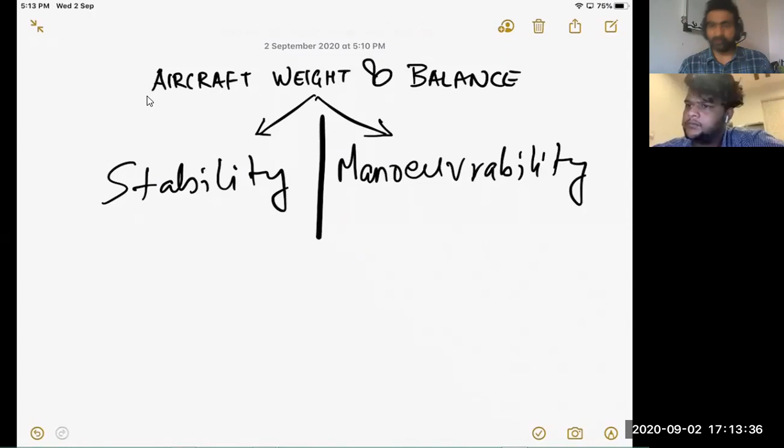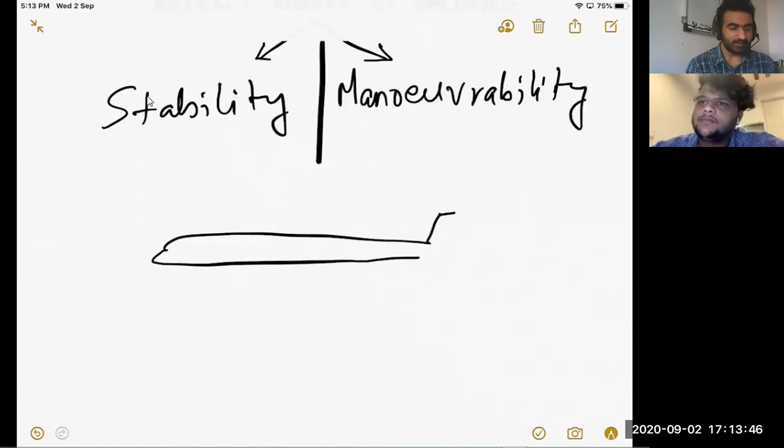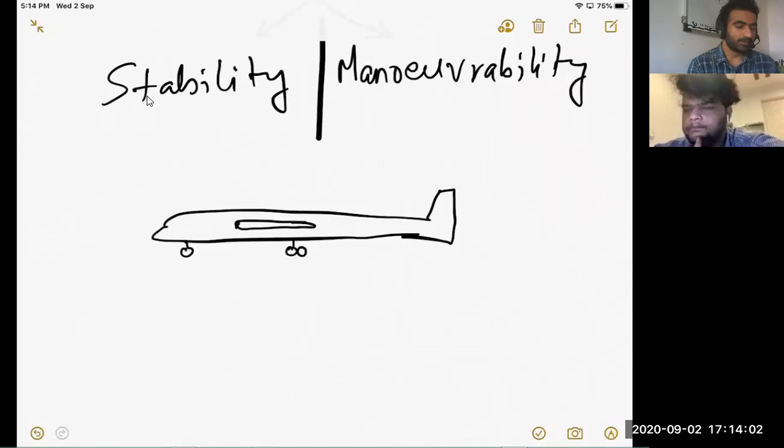So we'll keep stability and maneuverability in mind, and we'll understand that weight of an aircraft is one of the four major forces acting on an airplane. Now this is my airplane with a cross section of the wing. This is my nose wheel landing gear, and this is my main wheel landing gear.

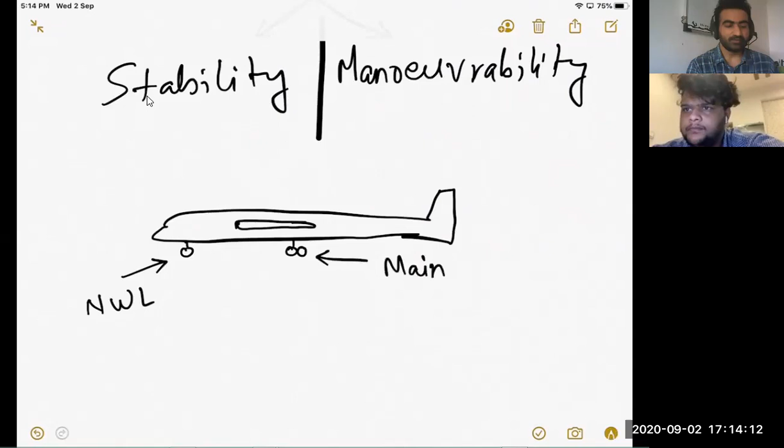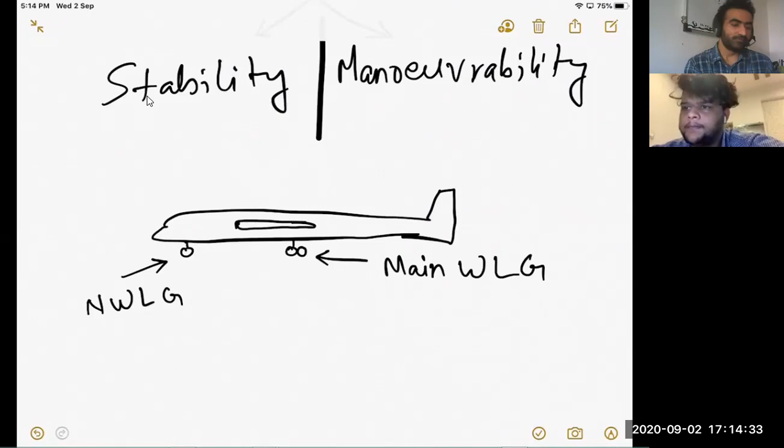Your major commercial aircraft, your Cessna, all these aircraft will have nose wheel and main wheel landing gears. There are certain aircraft which have main landing gears and tail landing gear. They don't have nose wheel gear. When you look at a cross section, you will see the nose landing gear is like this, and the main landing gear is like this. If the aircraft is like this, so nose landing gear and main landing gear like this.

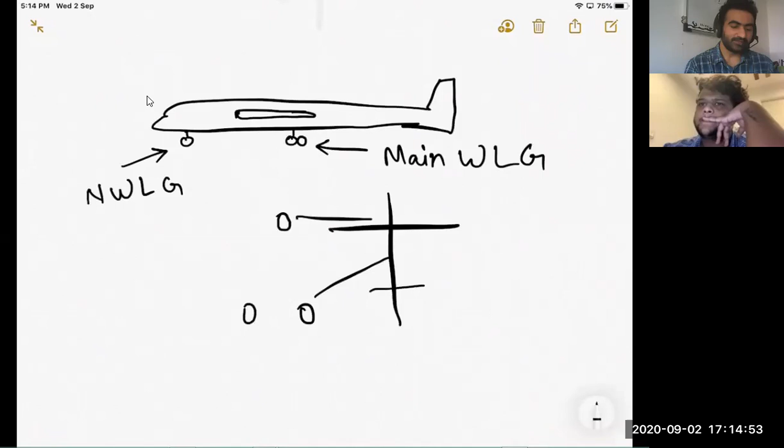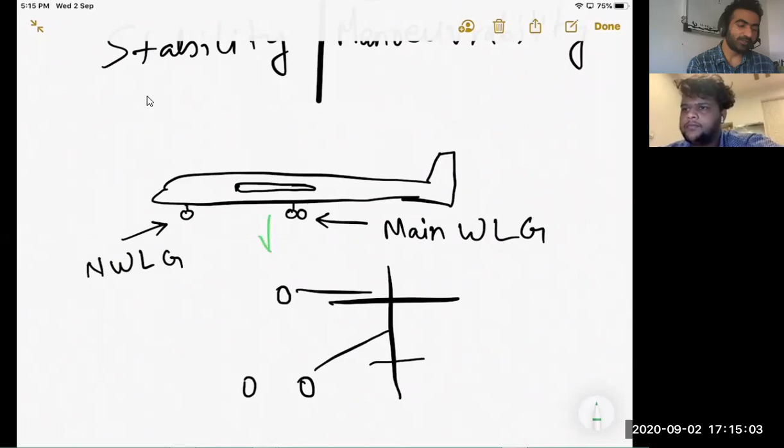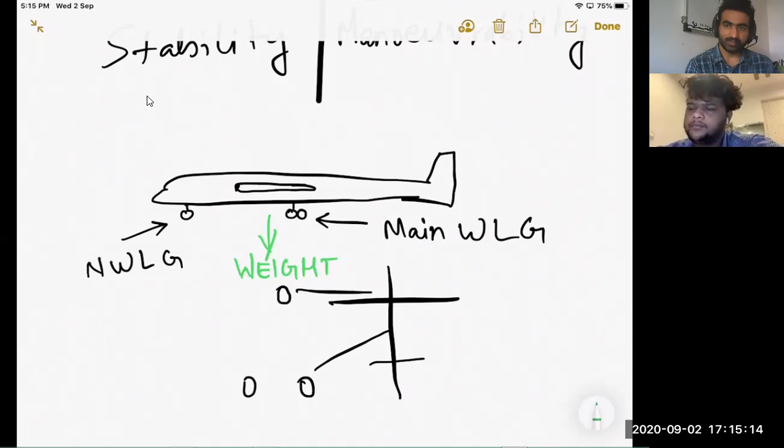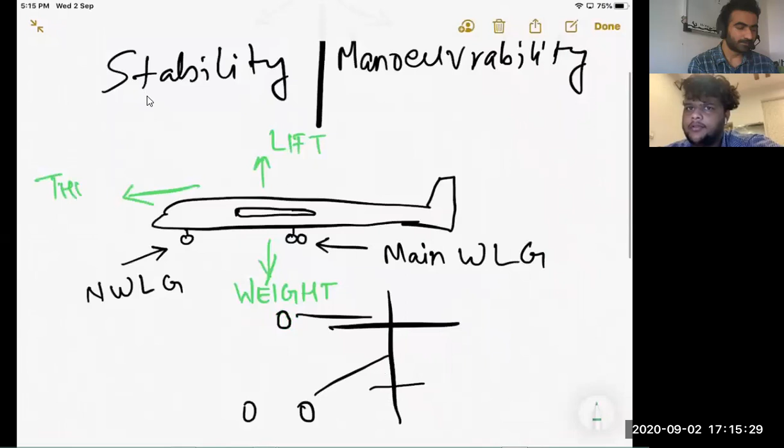Now, an aircraft is supposed to be under four forces. The first force that acts on an airplane all the time when it is on ground is known as weight. In order to counteract weight, we need to lift the aircraft up to fly with a force known as lift. In order to generate the lift, we need thrust. The moment you start getting thrust, there is an opposite force to thrust, which is in the opposite direction, known as drag. These are four major forces.

Now, all these forces act on an aircraft at a certain point where the whole weight of the aircraft is said to be existing. This area is known as center of gravity, CG. All forces act around or about this center of gravity. This center of gravity is very important. Your center of gravity determines your stability. Your center of gravity has to be within certain limits. It should not go beyond its limits. So every center of gravity has a forward limit and an aft limit.

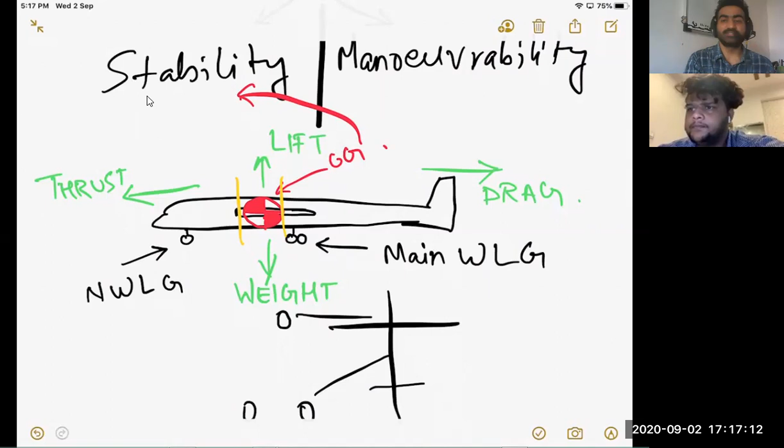The moment you start turning the plane, like you pitch up for takeoff, your center of gravity will move back. When you pitch down or when you are trying to put the nose down, the center of gravity will move. The movement of center of gravity should not exceed the forward CG limit and aft CG limit. Forward CG limit and aft CG limit. Now you will get a lot of sums where they will ask if your CG is within limits, or forward of forward limit, or behind aft limit. All these calculations we'll be doing in future.

Now CG is not a point, but it's a range. Now we need to know what is this range and how can we mark it on an airplane. So for every aeroplane, starting from a datum known as a reference point, taking a unit in mind, it could be millimeters, centimeters, inches, or feet, the aircraft is marked in points. This reference datum could start from the nose of the airplane, or from the nose wheel of the airplane. It will always be mentioned. Whenever it is not mentioned, you will assume that the nose wheel of an aircraft is the datum. Anything behind the datum is positive.

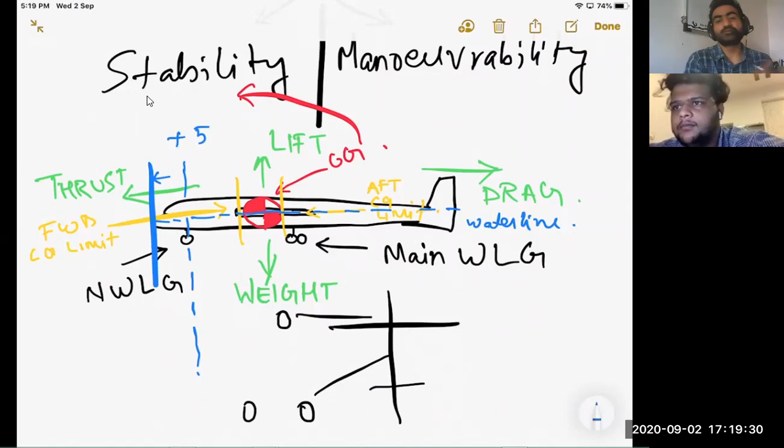So let's assume that the datum is at the nose cone of the aircraft. Then all stations are measured like this. This line is known as waterline. Now, using this line, I can nominate stations for every aircraft equipment. Where is the co-pilot seat or where is the pilot seat located? So I can say the pilot seat is located at +5. It means 5 feet from the nose of the airplane. I can say it goes up to +5 to +7. It means the range of the pilot seat is from +5 feet to +7 feet from the nose of the aircraft.

Similarly, I can determine where is the CG of my aircraft. So my CG of an aircraft could be said to be between +12 to +16. It means the total range of the CG goes up to 4 feet. Center of the CG will be +14, +2 feet here and there. Similarly, you can find out where is the tail fin of the aircraft. It could be +25. So you know it is 25 feet from the nose of the airplane.

Similarly, you can determine where is the cargo area, where is the passenger seating, where is the lavatory, where are the fuel tanks, where are the water tanks, potable water tanks, where is the generator, where is the alternator, where is the battery. So everything is given a location with respect to this datum only.

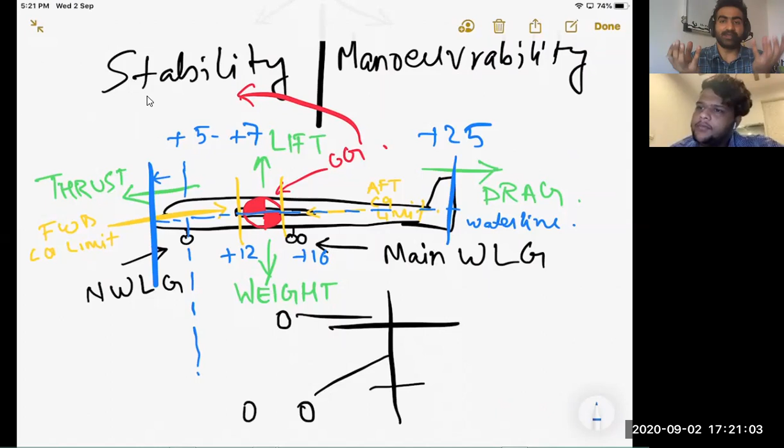Everything has mass. So while putting all this equipment on your aircraft, you have to make sure that the aircraft is balanced around the CG. So the CG acts as a pivot point.

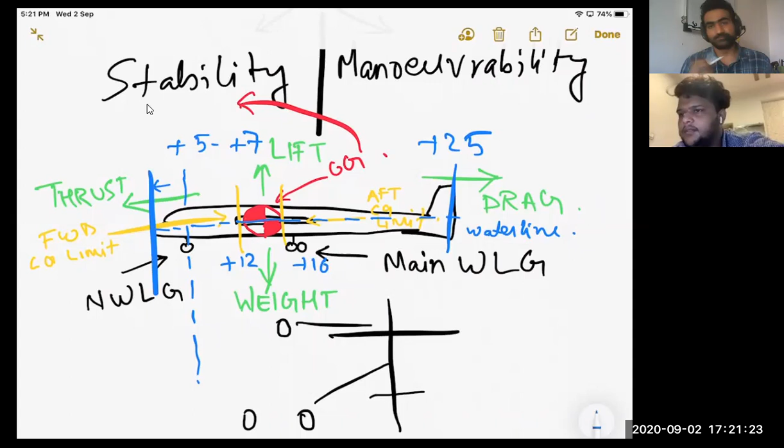If I say the aircraft is moving up, then it moves up with respect to the CG of the airplane. So like this and like this, just like a seesaw.

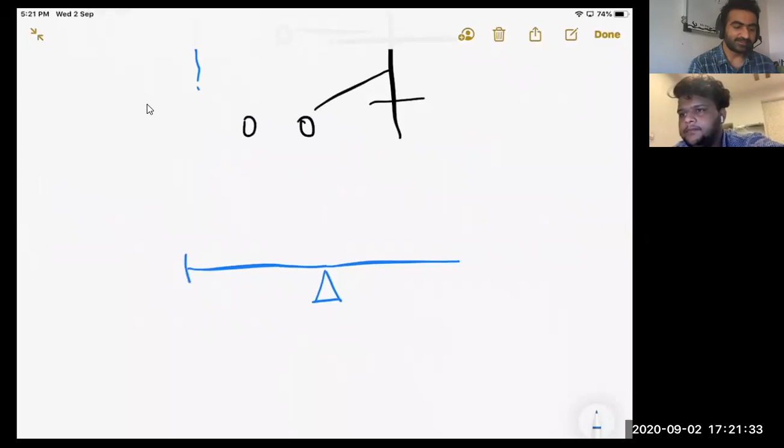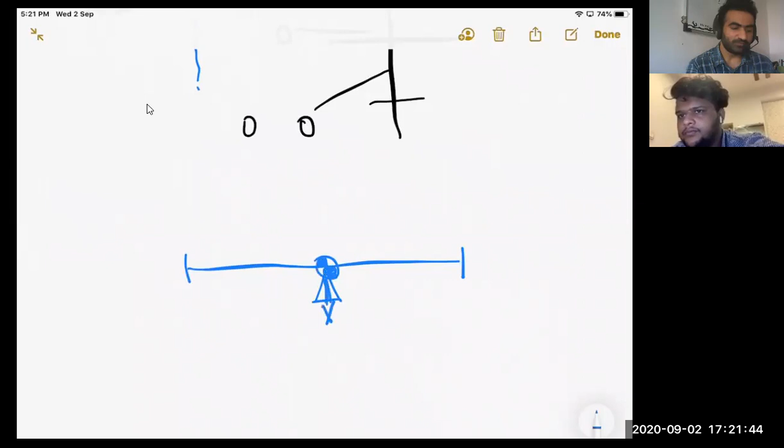Do you remember how a seesaw works? It needs equal length on both sides. This is the CG of the seesaw. All the weight is going down from here. Say this is 10 meters and this is 10 meters.

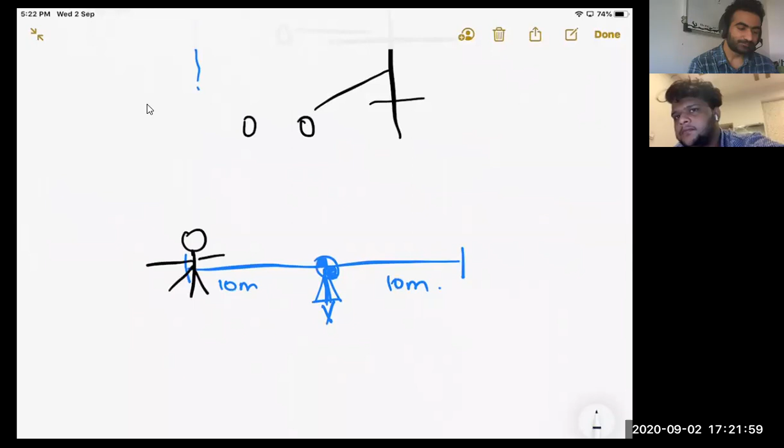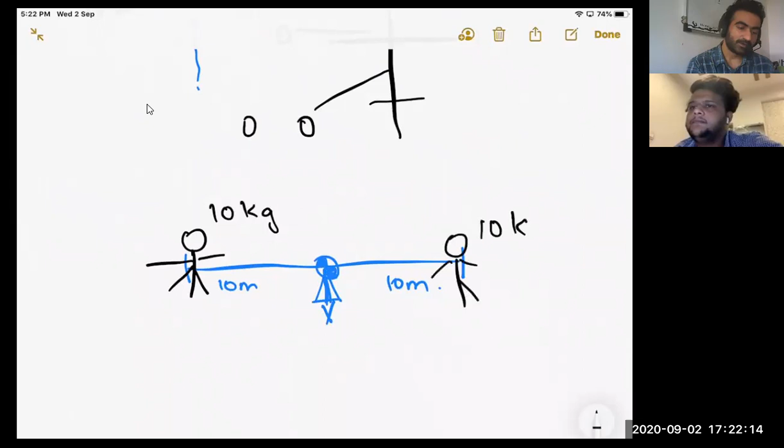Now, if I have to make a child sit on the seesaw, say a person sitting here, 10 kg, a little child. How much weight do I need on the other side to balance the seesaw? Same, 10 kg.

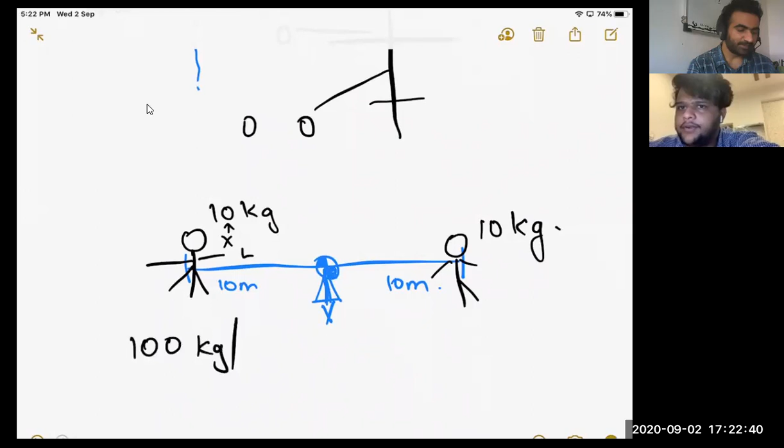This length multiplied by this mass or weight gives you 10 into 10, 100 kg per meter. Same here, 10 into 10, 100 kg per meter.

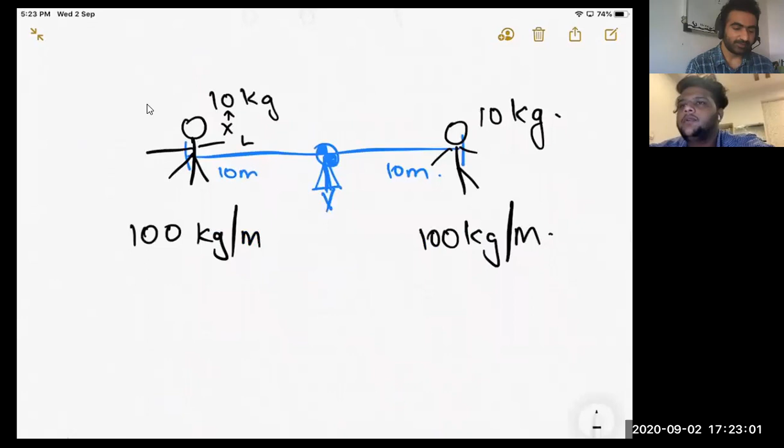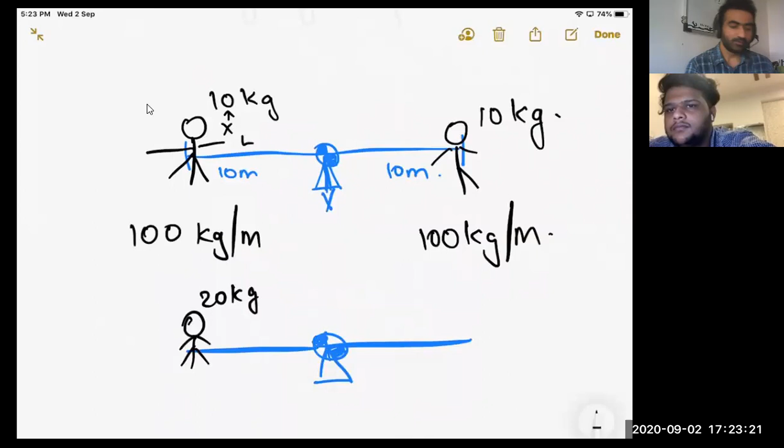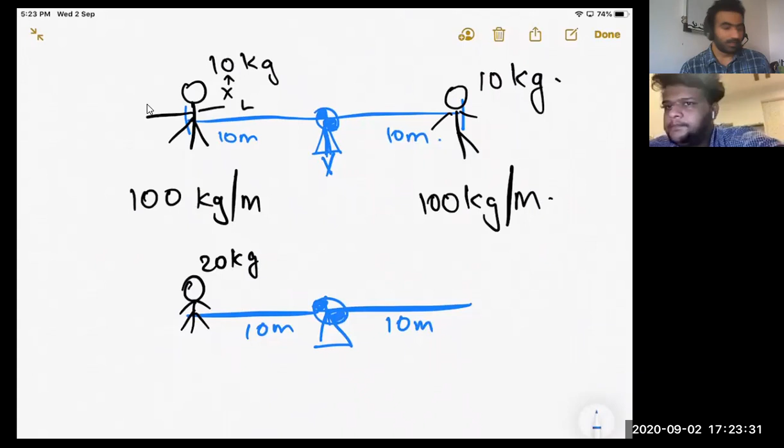Now say there is an elderly child who is not 10 kg, but 20 kg, sitting on the seesaw. We both know that this is 10 meters, this is fixed, we cannot change it. What should I add here to balance? Same 20 kgs.

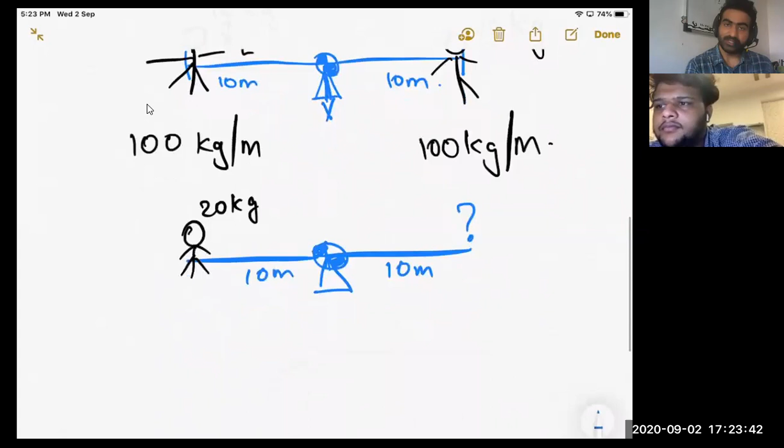Good. Why? Because you need an answer of 200 kg per meter. And here also you need 200 kg per meter.

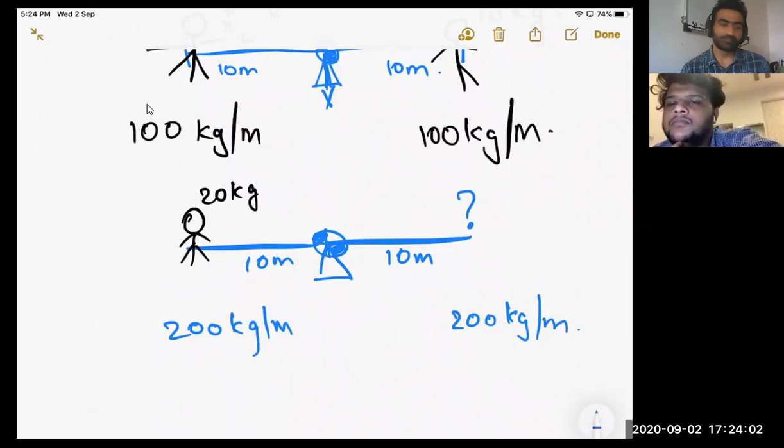What if I don't have a 20 kg child? I only have a 10 kg child. So how will I balance? We knew that 20 into 10 gives 200. Here I have a 10 kg child, so we need to match 200.

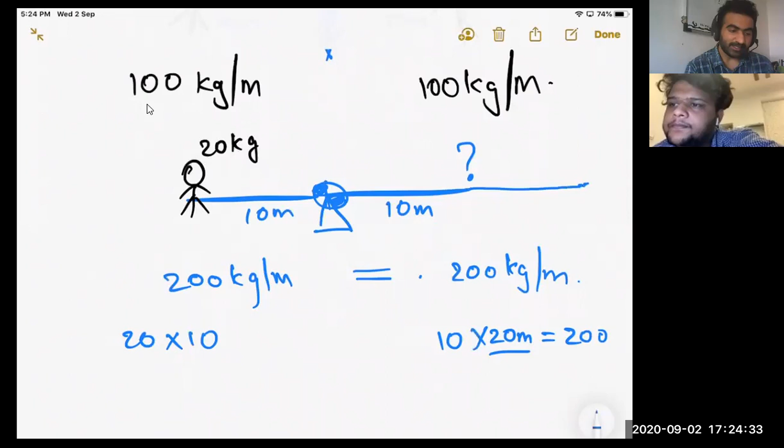So we'll increase the length. By how much? By 10 meters, that is 20 meters. So if I increase the length by 10 meters, then I can balance the seesaw using a 10 kg child.

This length that we have here is known as the balance arm. This is how aircraft loading is done, in simple words.

You check the station number, compare it with the CG, how far it is with respect to CG, and then what is the weight of this equipment compared to this equipment, and how can I balance both the forces, the weight, on both sides of the CG?

So if I have a 20 kg passenger sitting in the forward section of the aircraft, my aircraft will be balanced. If I have a 10 kg person sitting in the aft section of the aircraft at station plus 20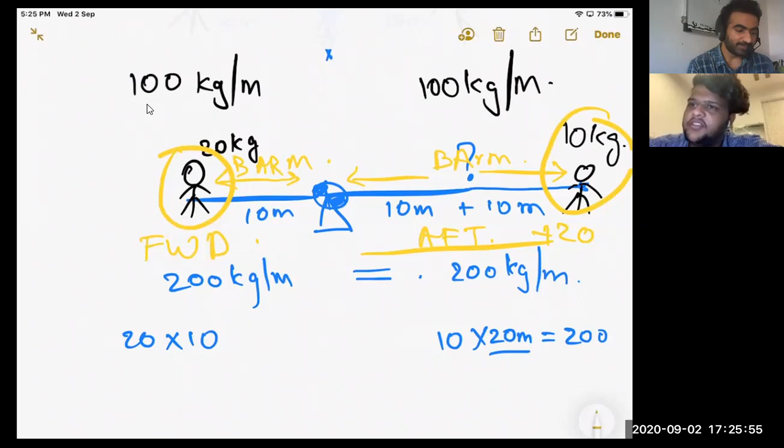from CG, and here it is from CG minus 10 from CG, because it is forward of CG right now. So forward of datum or forward of CG becomes minus, rear of CG or aft of CG becomes plus, just like the datum.

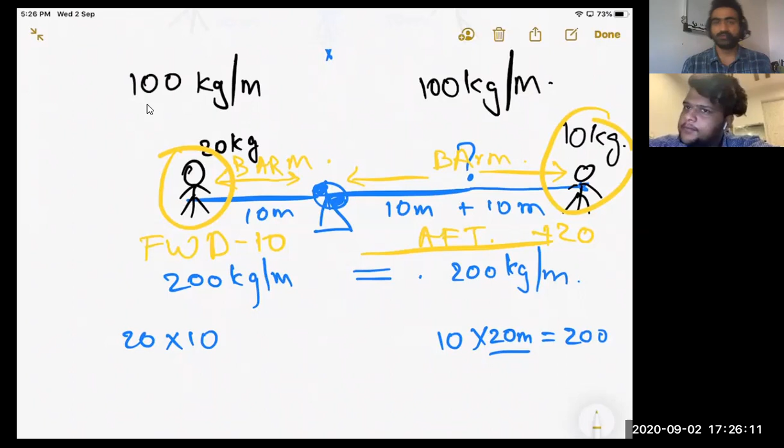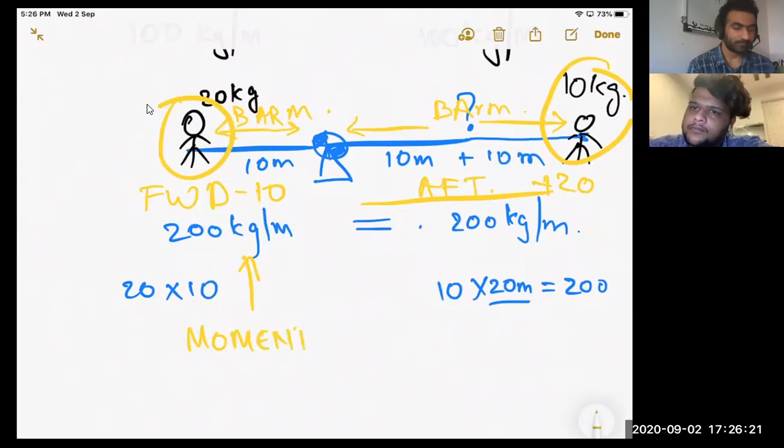This is how you do loading. This force, which is a combination of length into weight, is known as moment. Are you following? Yes, I am.

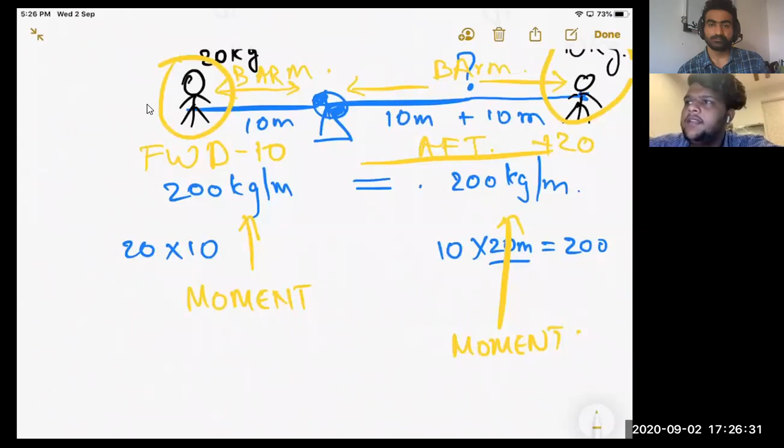So if you have an aircraft which can seat up to 140 passengers, but you only have, say, 20 passengers, do you think you can give those 20 passengers the first 20 seats from the forward cabin of the aircraft? Yes sir, I can give them.

Why? Then the balance of the aircraft will shift. You will need an equal amount of weight equally spaced from the CG, or you will need a lesser amount of weight at a farther distance in the cabin. Either you give 10 people forward cabin and 10 people aft cabin, equally separated from the CG, or you calculate the moment force and decide where to sit whom. Are you following? Yes.

So, is this not just for smaller aircraft, like turboprop aircraft? No, this will happen mainly every day for every aircraft before flight. Okay, for every aircraft, every flight.

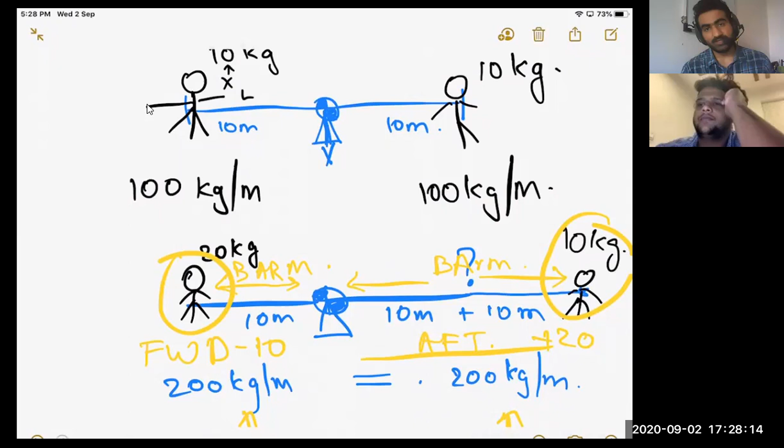Passenger load has to be equally distributed, calculating the moment and force equally. Cargo load has to be equally calculated using the same force.

In any basic aircraft, there are two cargo locations: one is forward cargo and one is rear cargo. The position is given in such a way that we have space to add or remove cargo to balance the forward arm or rear arm.

So what is the arm? This becomes the forward arm from CG, and this becomes the rear arm.

For smaller aircrafts, it is very easy to do weight and balance. For bigger aircrafts, the procedure is the same, but it becomes a little complicated because more fundamentals and more units are used. For example, if an aircraft is flying and the CG limit is forward...

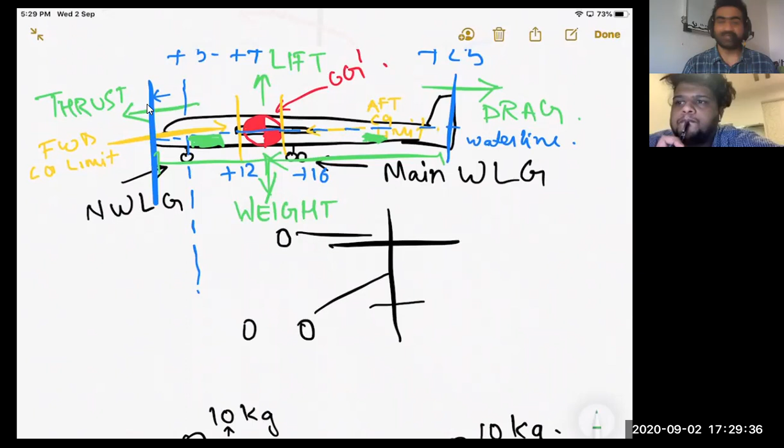If the aircraft weight is forward of the CG limit, then certain things happen affecting the stability and maneuverability.

This is what we'll be learning: what happens to the stability, what happens to the maneuverability, and if it is aft, will it stall because there will be no speed then?

When CG is outside of the forward limit, your stalling speed increases. You stall later, at a higher speed.

Why? Because, see, if this is the CG point of the aircraft, if the aircraft CG is forward of it, the aircraft will be like this. This is not how an aircraft stalls, aircraft stalls like this. So it will take an aircraft at a higher speed to stall like this.

If my CG is behind the limit, then the aircraft will always be nose up like this, so it will stall earlier than the specified stall speed. So this is how you have to imagine.

If the CG is behind the CG limit, aircraft will be nose up. If the CG is forward of the CG limit, aircraft will be nose down. Now when the aircraft is nose down, the stability actually increases.

Yes, stability increases, it means it is difficult to maneuver the aircraft. You don't need increased stability, it is not good always. Everything has to be within limit, everything is predetermined by the manufacturer, so you have to stay within limits.

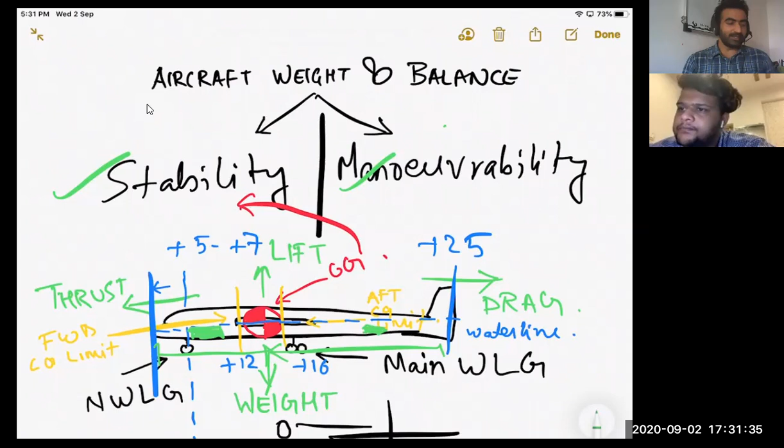Now, how many landing gears do I have? I have one nose wheel and two main landing gears.

These are the points where the actual weight of an aircraft could be measured. So what you do, suppose if the CG of an aircraft is here in the center...

Then you calculate the moment force for the nose landing gear by multiplying the arm and the weight. So where is the nose landing gear with respect to CG? How far ahead? Say it is 5 feet forward.

You put the nose wheel landing gear on a weighing scale. There are small weighing scales. You jack the wheel, lift it, slide the weighing scale in between, then let the wheel rest on the weighing scale to measure.

And this has to be done beneath all three landing gears: right main landing gear, left main landing gear, and nose wheel landing gear.

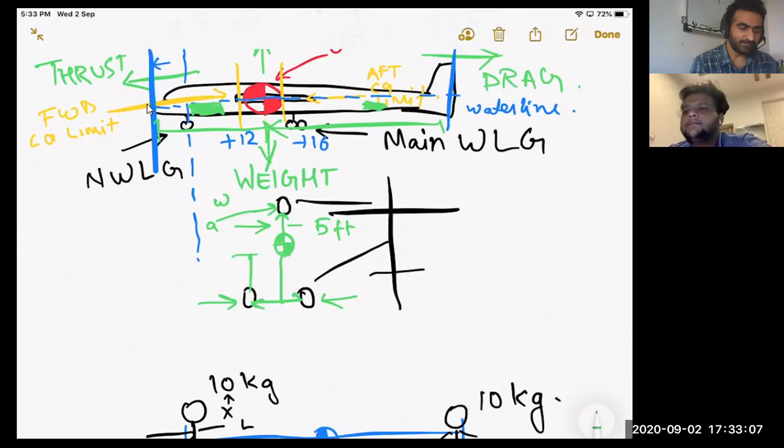Here you will have to measure twice: one mass and weight for this balance arm, and one mass and weight for this other balance arm.

They'll be same, or they could be different. CG range is not always only in the longitudinal axis, it also ranges to the lateral axis, like this. But most of the times it will be same and it has to be same. But it's not compulsion, it depends upon your loading, your passenger seating, your fuel loading. If one wing has lesser fuel compared to the other wing, then one side will have more heavier weight.

So you'll have to adjust passengers more on this side or cargo more on this side to balance. So the formula remains same: length into weight gives you balance arm or the moment force. So you calculate the moment force and the moment force should be equal. The length might not be equal, the weight might not be equal, but the moment force has to be equal to balance.

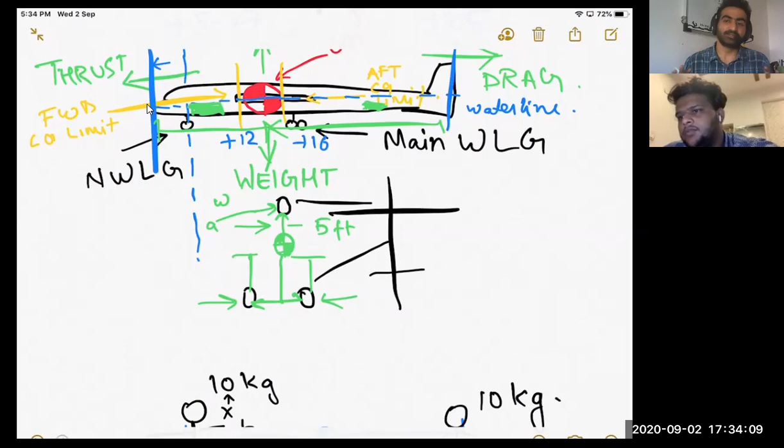So to weigh and balance the aircraft, you need to calculate the total moment of an aircraft. How do you find the total moment? By adding up the individual moments. Let's just see one formula.

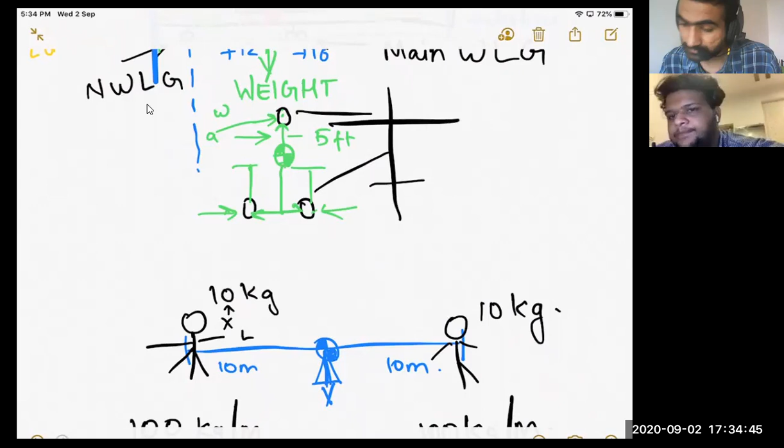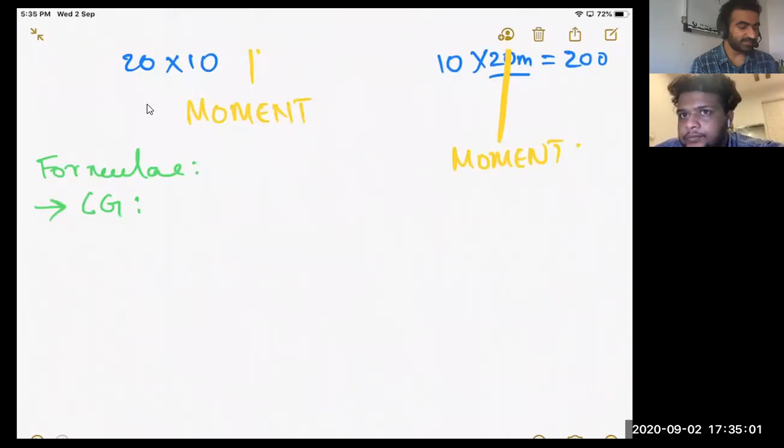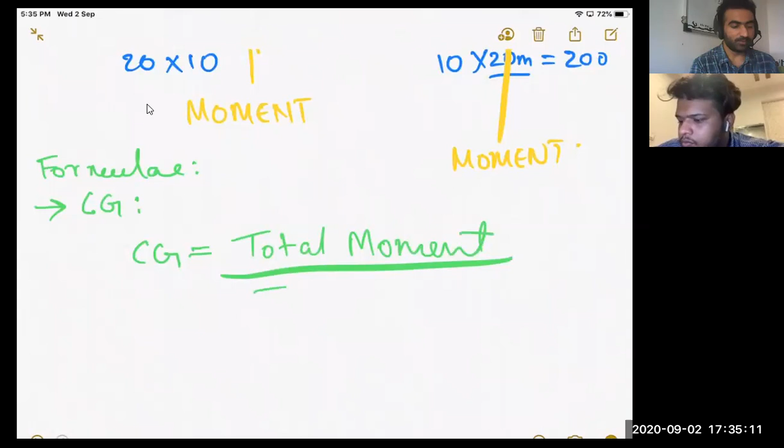First formula is to calculate the position of CG. Say you need to determine where is the CG. So the formula for CG, center of gravity, is equal to total moment upon total mass.

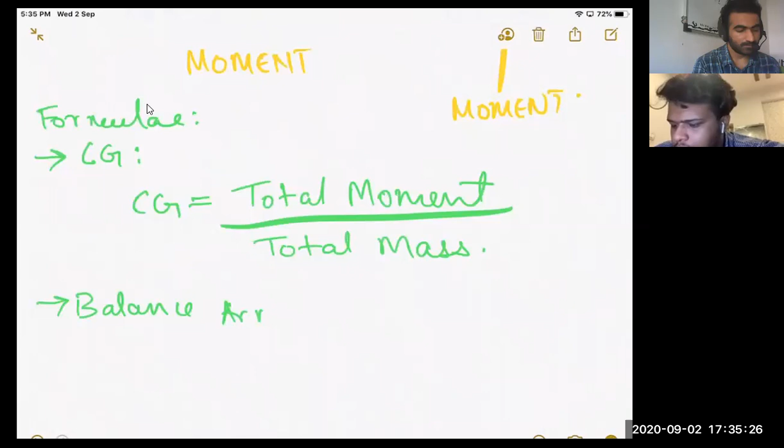Second formula, balance arm. It is very simple. Balance arm is equal to total moment upon total weight. Weight and mass are separate things, please remember that. Mass is the amount of matter, and weight is the mass into acceleration due to gravity. So weight is a force, mass is not a force.

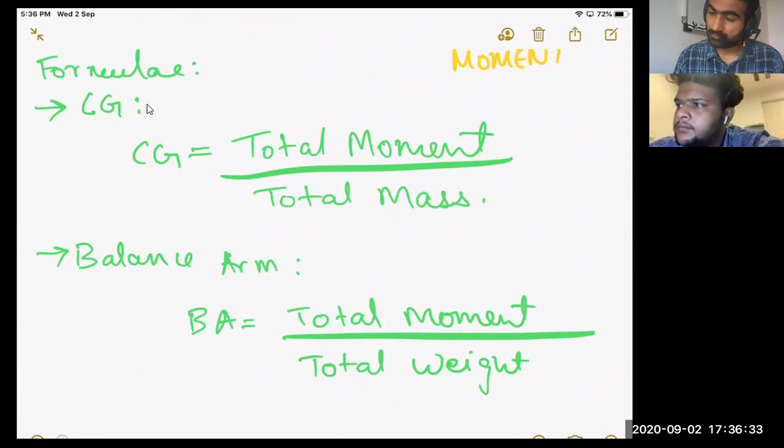Okay, yes sir. Any questions so far? No sir, no questions. Are you understanding? Yes sir, I am.

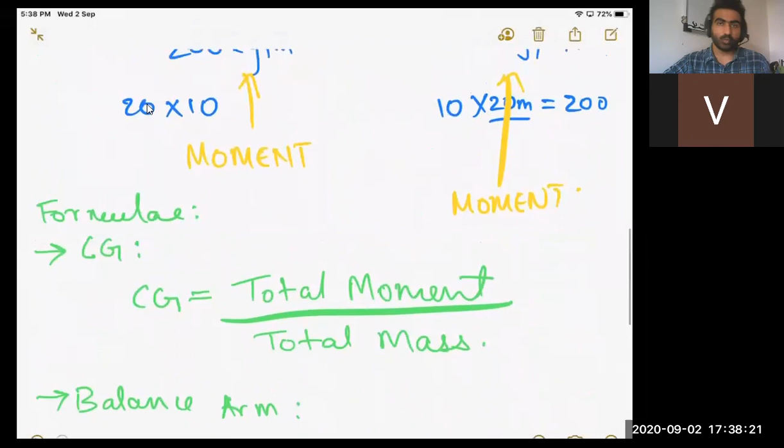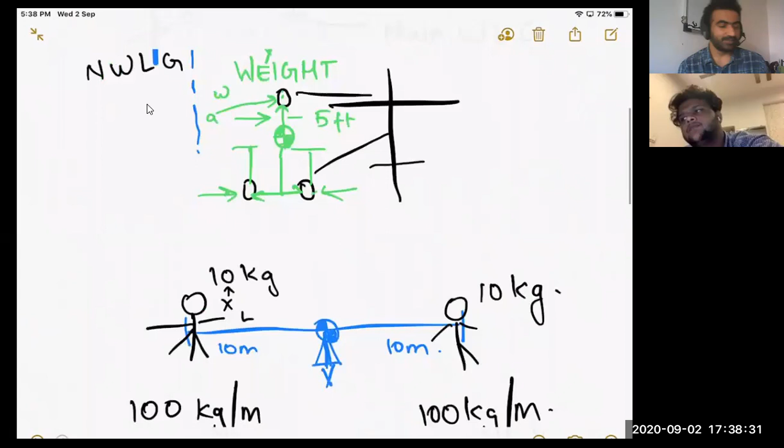Now, weight and balance is not always all about calculations. Calculations will be easy once we remember all terminologies. Before going through terminologies, we need to understand a little bit of theory as to what happens to the structure of an aircraft. Your weight and balance, your stability, maneuverability, everything is dependent upon the structural integrity of an aircraft. What does it mean? If you don't keep proper weight and balance, then the aircraft structure could fail and break into pieces. It is not safe.

Now what happened? Because it was a cargo plane, there was a lot of cargo, and all the cargo is tied down using ropes and harness and everything. Taking off, one of the cargo holds broke its harness and it went behind in the cargo hold. This happened while doing this. So the cargo was supposed to be here, and because the aircraft was taking off, the harness broke down and the cargo went there behind.

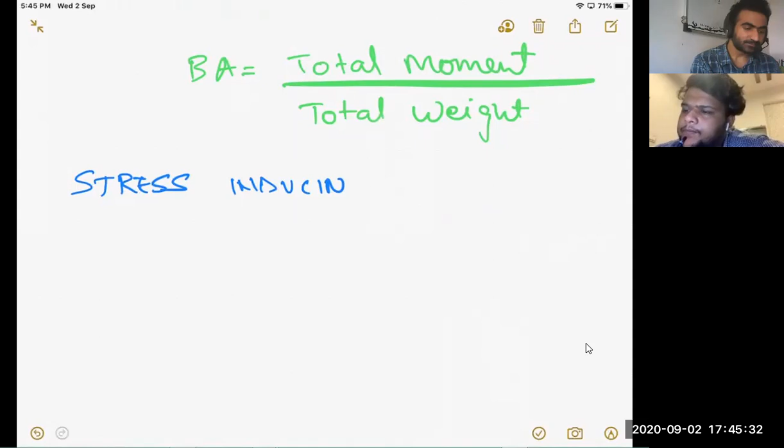This stress can be induced by four forces on an aircraft. Whenever you start loading the airplane, no matter where you have put the equipment, the passengers, the cargo, the fuel, the oil, the aircraft starts being subjected to stress. The structure of an aircraft is under stress all the time. During flight, before flight, after flight, there are certain forces which induce stress. Which are these forces?

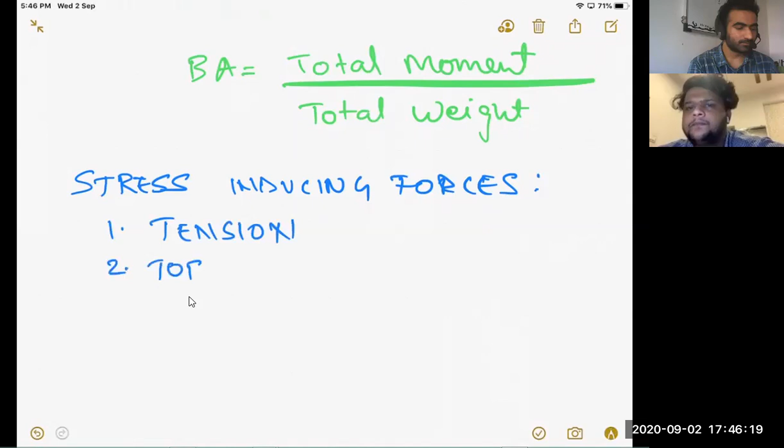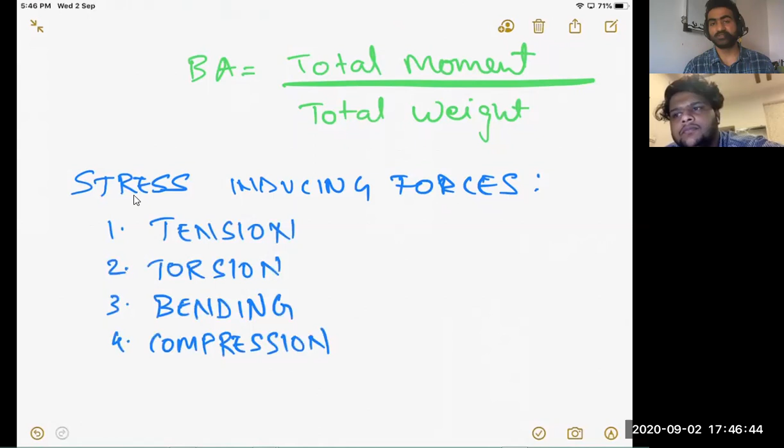Tension, torsion, bending, compression. These are different forces which induce stress on an aircraft. Your aircraft structure absorbs these stresses. It is designed to absorb these stresses.

So the weakest part of the aircraft will be at the CG, where the center of gravity is? No, there is no weakest part of an aircraft. All parts are equal in handling stress. CG is that point where the weight of the aircraft is supposed to be acting. The whole weight of the aircraft acts through the CG. So if you want to weigh the aircraft, you weigh it at the CG point, center of gravity.

In motorbikes that we use, there is a main stand and a side stand. They both are aligned with the CG of the bike. That's why one side stand can balance the whole bike. Everything has a CG. While manufacturing, everything has a CG. Even this mouse that I have will have a CG, so that its structural integrity is balanced.

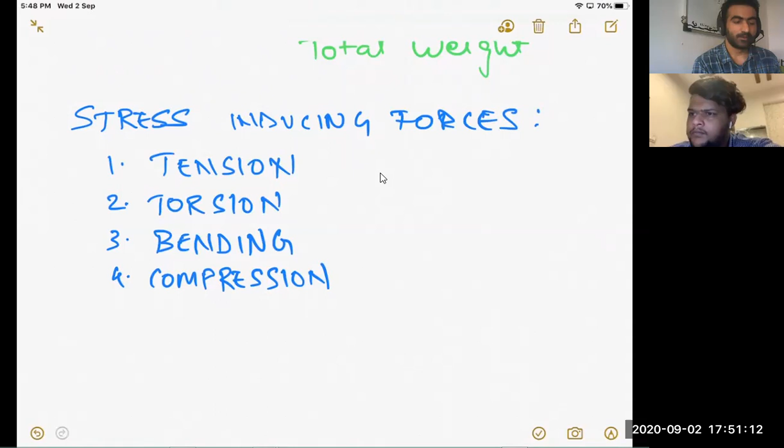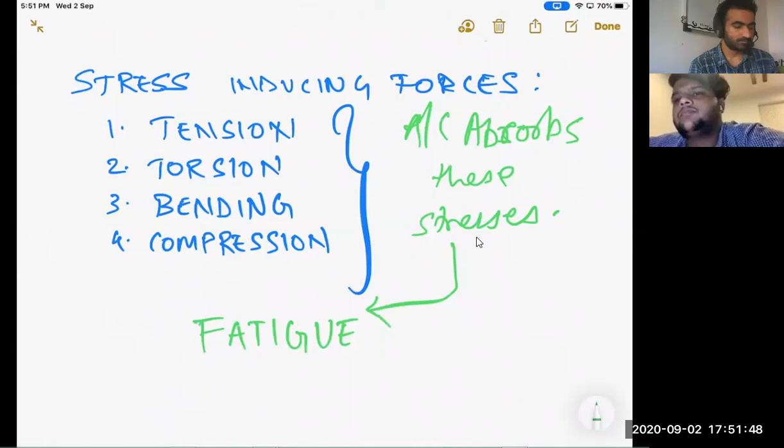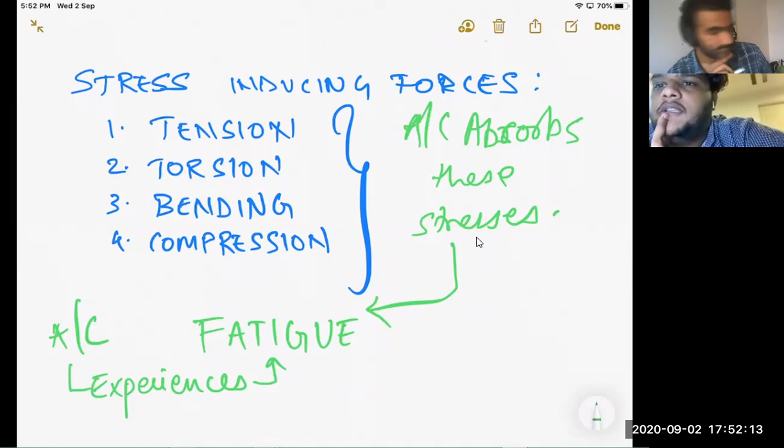Aircraft absorbs these stresses. The moment aircraft starts absorbing these stresses, something known as fatigue is induced into the aircraft. What do you understand by fatigue? Fatigue, I think, I don't know, sir. What is fatigue? Feeling of dizziness. You write it down. Yes, sir.

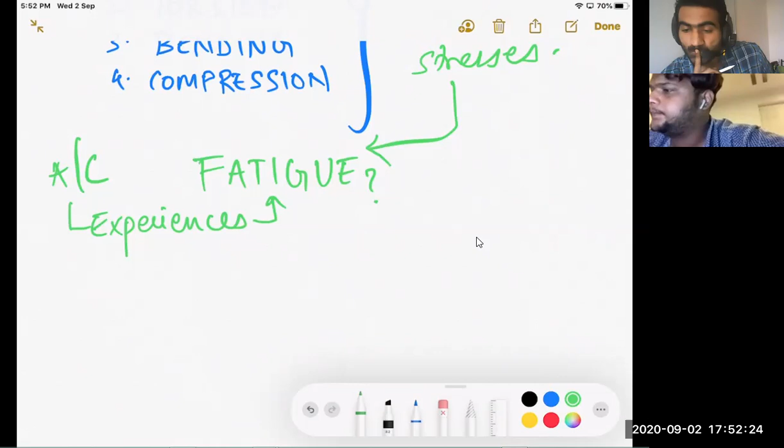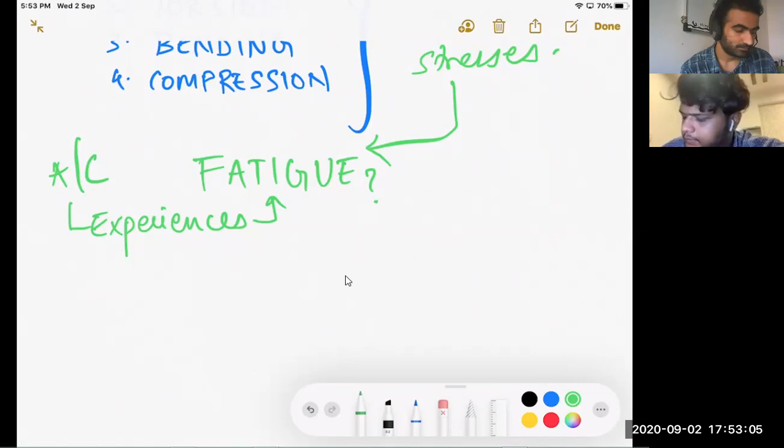Fatigue is the permanent loss of physical properties such as strength, durability, hardness, etc. Strength, durability, hardness. Right, second point. Fatigue is cumulative and non-reversible.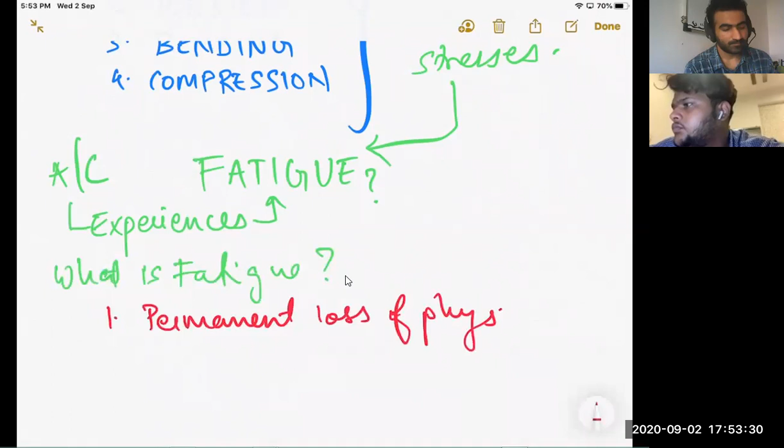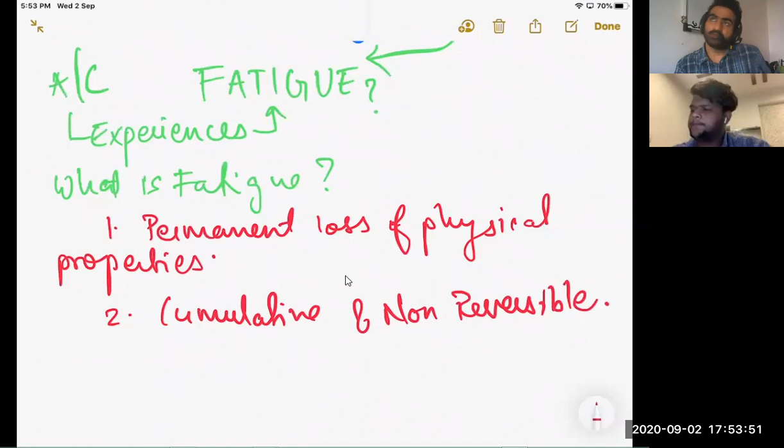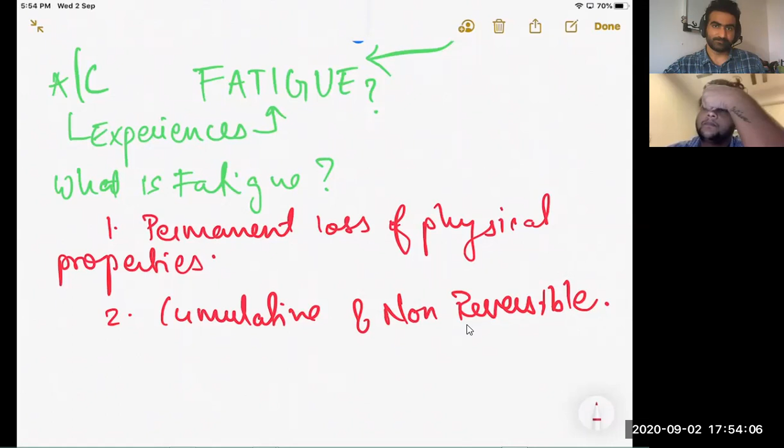So can we say fatigue is a type of corrosion? I'm not sure if you can quote it, but corrosion could be a type of fatigue. But corrosion happens due to certain corrosive factors. It does not happen due to stresses. Fatigue is something which happens due to stresses when the aircraft is absorbing the stress. Okay. Cumulative and non-reversible.

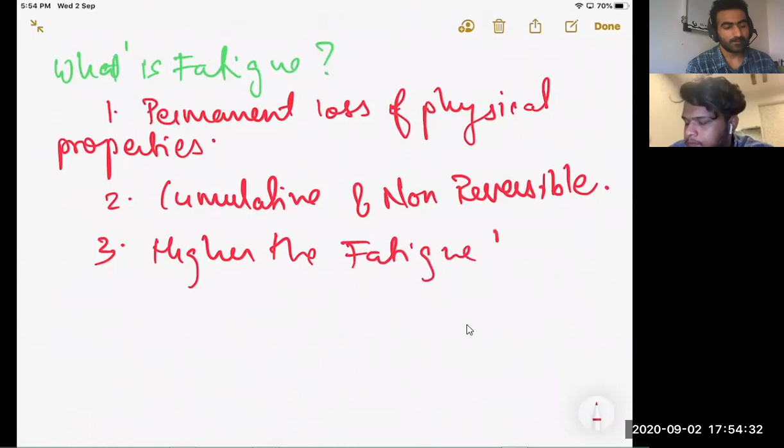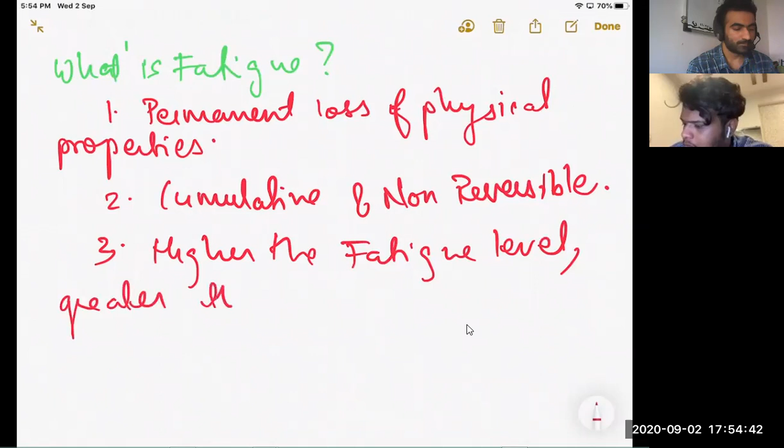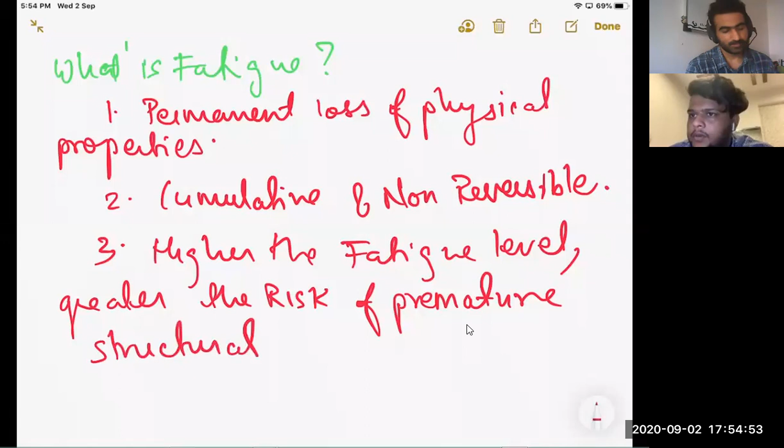Higher the fatigue level, greater the risk of premature structural failure. So you need fatigue which is controlled, but fatigue will happen. Why do you think an aircraft goes out of service after a certain number of years? Why can an aircraft not continue working forever? Because of fatigue.

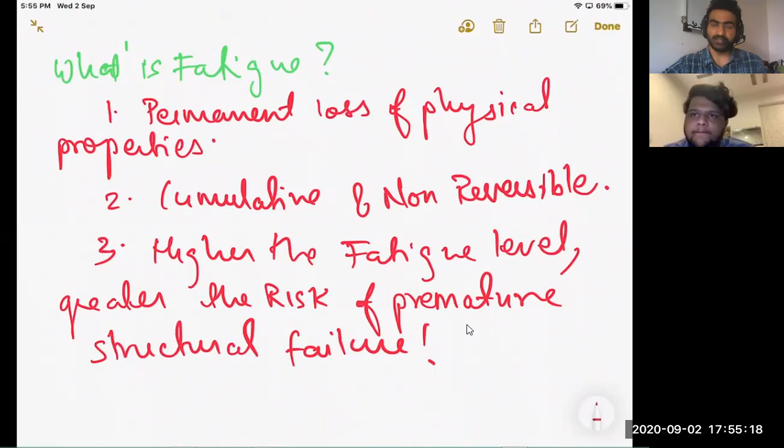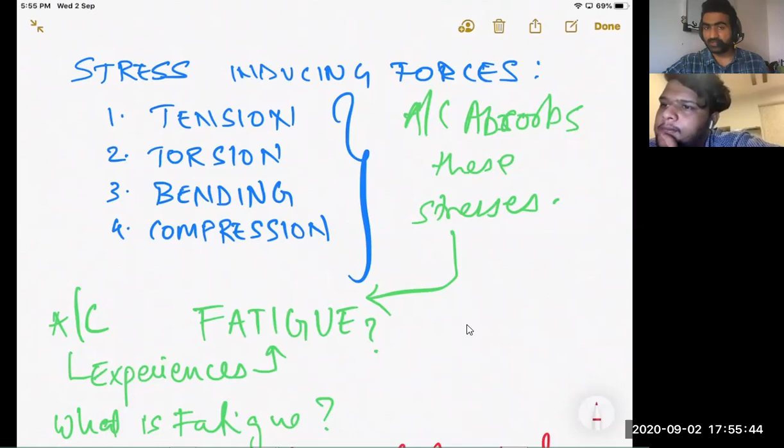Simple. The structural integrity is slowly reducing because of these forces that the aircraft is absorbing. So slowly, the aircraft structural integrity keeps reducing. That's why the aircraft has to be subjected to scheduled maintenance tasks to restore the fatigue, to check for excessive fatigue, to check for corrosion, to check for loss of structural integrity, and so many things.

Now, if you don't detect fatigue in the long term, if you don't account for fatigue, then it will cause the aircraft structure to fail altogether. So it is very important for you to keep the fatigue checked in a timely manner.

How do you keep this fatigue in limit, and how weight of an aircraft affects the fatigue is what we need to understand in the theoretical aspect, because we are dealing with weight and balance. If you follow the weight and balance protocols properly and keep checking the fatigue, then you will have more time with the aircraft in service. So weight is something which you can control to reduce the fatigue.

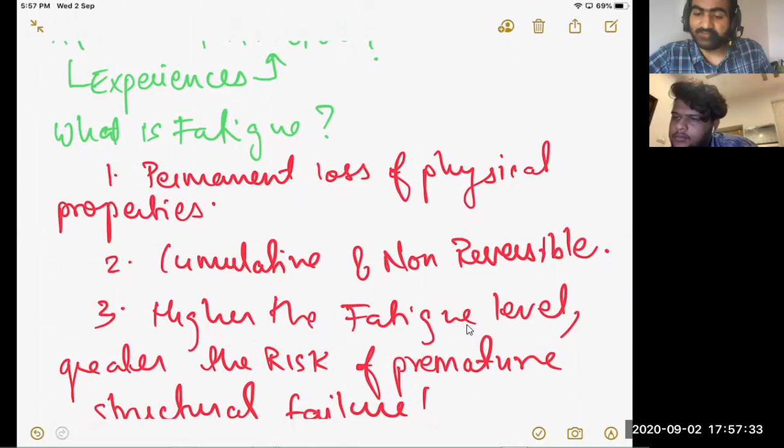If somebody asks you, which is the principal stress and fatigue inducing factor for an aircraft, what will be your answer? Can you repeat the question? Which is the principal stress and fatigue inducing factor of an aircraft? What factors induce stress and fatigue into aircraft structure? So that will be weight. What are all the factors?

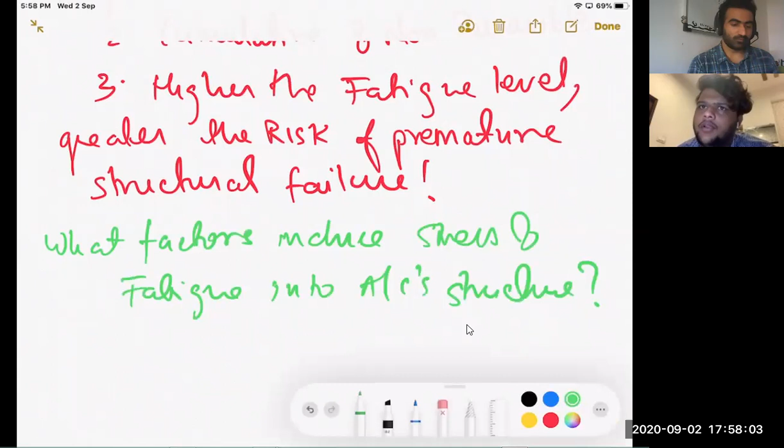First factor is age. As the aircraft starts aging, it induces certain amount of fatigue. Fatigue due to age, stress due to age. Second is inappropriate handling by the pilot. If he doesn't keep the aircraft balanced or within limits, then it will be subjecting the aircraft to excess amount of stresses, which otherwise should not happen. Then the aircraft will reduce its structural integrity sooner than expected.

Third thing, related to corrosion: environmental and climatic conditions. And fourth is weight of the aircraft. Amongst these, which is the principal stress and fatigue inducing factor for an aircraft? Weight. Yes.

Principal fatigue and stress inducing factor. And this is why we need to first understand what are the effects of overloading an aircraft, and what are the effects of CG not being in limit. After understanding these factors, we'll be good to go to understand and solve weight and balance of the aircraft. Yes, sir.